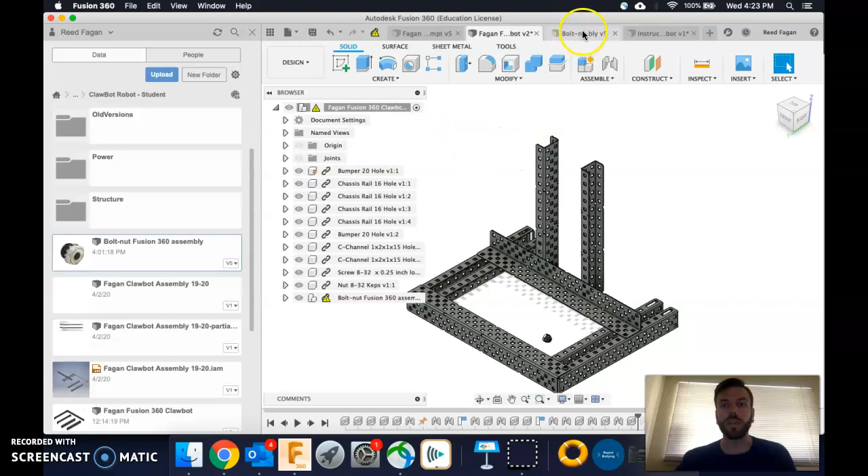But remember from a couple videos ago, the change I made was turning the joints visibility on and off, then saving it a couple times like that. So it probably just has to cycle through turning it on and off on this screen. Let me make this screen a little larger.

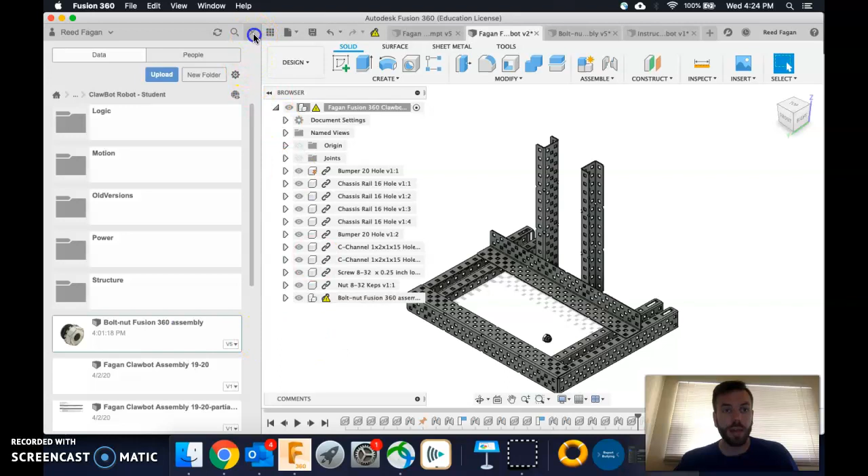Let's keep moving forward. If you go to the data panel and right-click on your assembly, find whatever folder you stored it in, just right-click on it and say Insert into Current Design. That is how you get what I've got here. Let's keep moving forward with it.

I just put more in and placed them all. A couple videos ago, the one called 2A, I showed you how to position them up and down and right and left by going to the top view, so you can really see what's happening as you place it. So I'm going back to the home view. Let's keep seeing the steps I've taken.

I'm putting some more in there, and now we're almost up to the present. So the next thing I do is a mirror. I actually create a plane here.

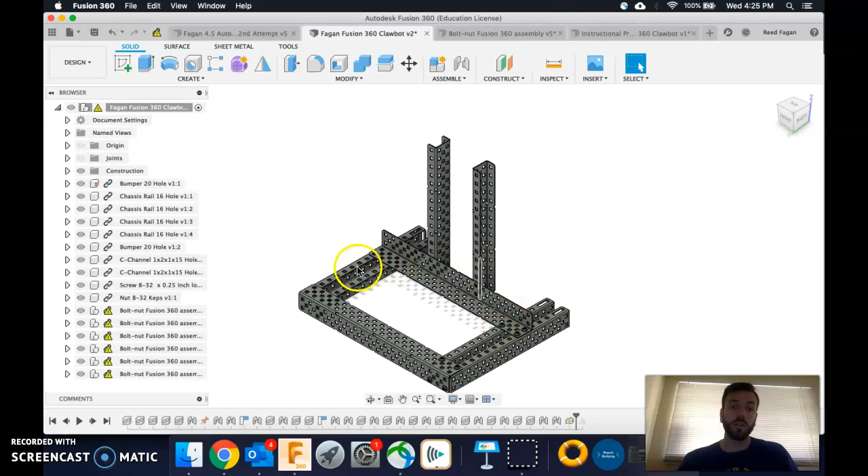I use that plane so I can mirror these components with their respective joints to the other side. Actually, I think I mirrored just the components. I don't know if the joints also copied - might have to check on that. Anyway, let me show you how to make that mirror in order to make that happen.

When I hover over it, it'll show you here. Interestingly, it does not seem to show a mirror in our browser, only kind of shows up down here. I wonder if I can right-click on this and say show visibility - no, not really. I made sure to turn the visibility off because it was annoying me.

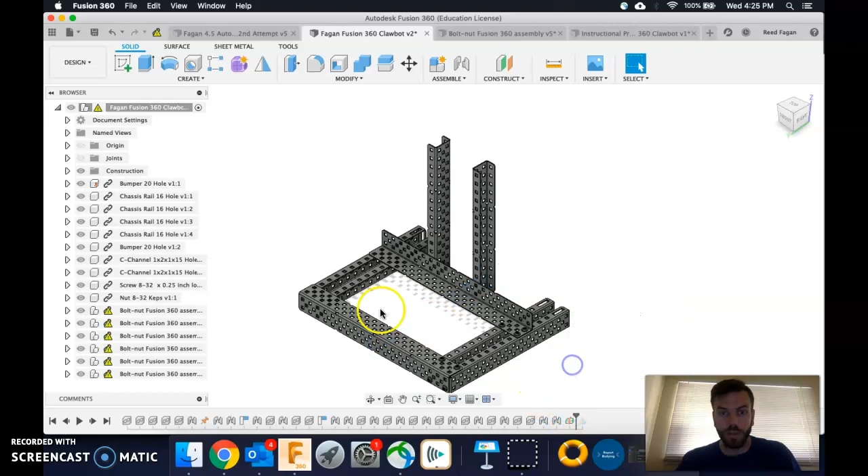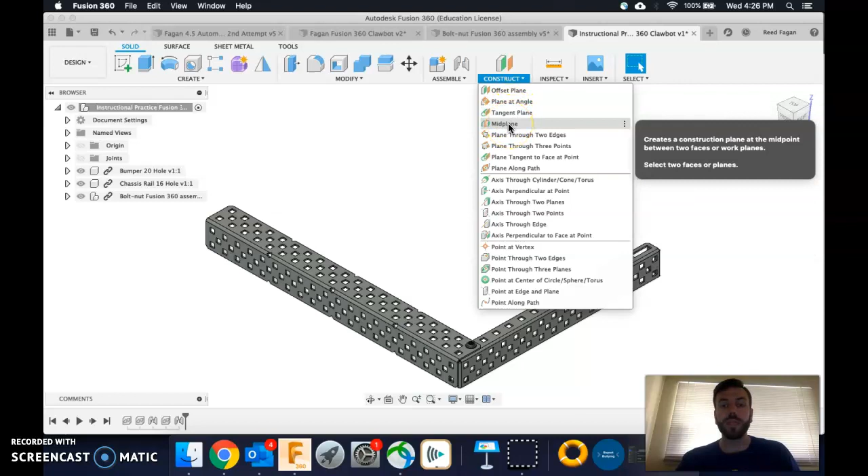But here's that process, my instructional one. Let's go to the home view. Essentially, we want this bolt to end up over here. So one way we can do this is by constructing a midplane. The midplane is really easy to create.

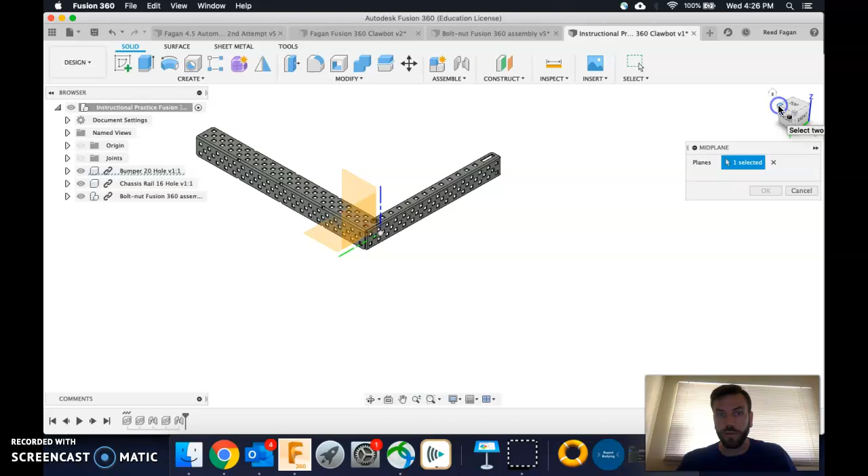You basically choose the two opposite sides, and it's going to put something right in the middle. Since I don't have one of these over here, I can use this edge of this face right here, zoom out, and use this view cube, zoom in, and say this is my other edge. You have to have two selected - it says two selected.

Now I say OK, and actually before I click OK, you can look - it's going to be right in the middle there. You can see this line, that is the plane, and it goes right through the middle, exactly what we want. So I'm going to click OK, and bada bing, bada boom, I've got my plane.

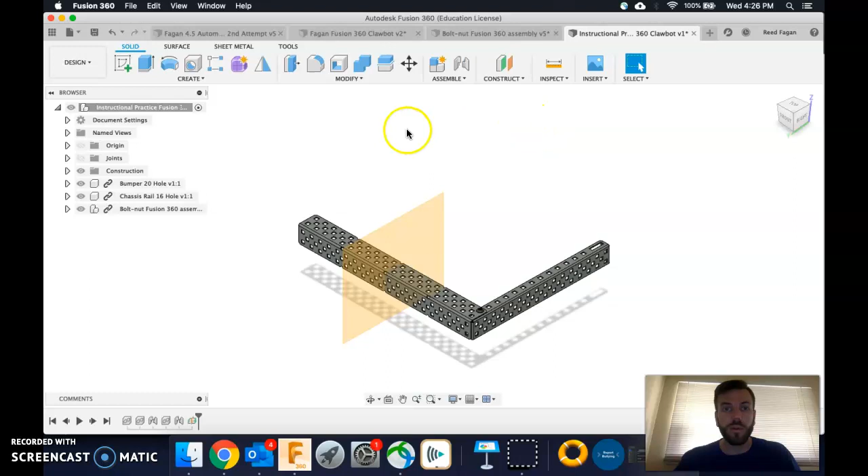The next part is really simple. I'm just going to go to mirror. You have to go to Create and Mirror. What I did is I clicked on these three dots and said pin to toolbar. So I've got mirror - you got to select what you want to mirror, and I wanted to do components, so it doesn't give joints as an option, so I'm assuming the joints go with it, not really sure.

But the components I want to mirror, you select all of them, and you can even do it over here - I think this is the easiest way. You just click, and you're going to have several in a row that say bolt nut, bolt nut, bolt nut, all those assemblies. Just click all of those.

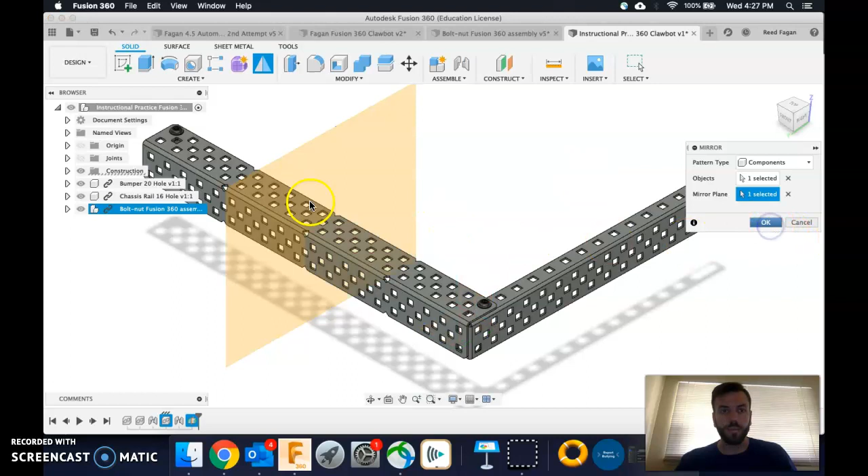Once you have the 4 here and the 3 back here, then select your mirror plane, which in this case is that right there. Click OK, and check it out - there it is. If you place them well to begin with, then you should find that they place pretty well on the other side, smack dab in the middle of the hole.

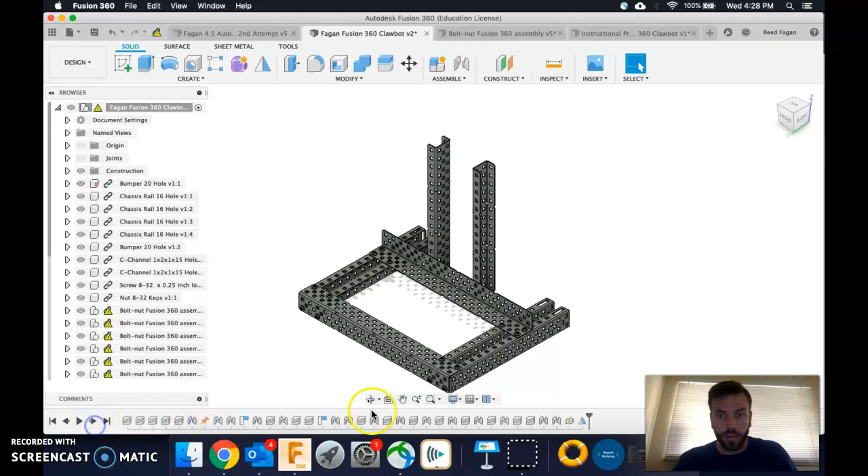I think that's about all we need to show you. Oh, the last thing that would bring you up to where I'm at - actually it takes us further than where I'm at - I forgot to put bolts in here. Of course you could include that with your mirror step also. Hope this helps. Expect some more videos to show you where to go beyond this.